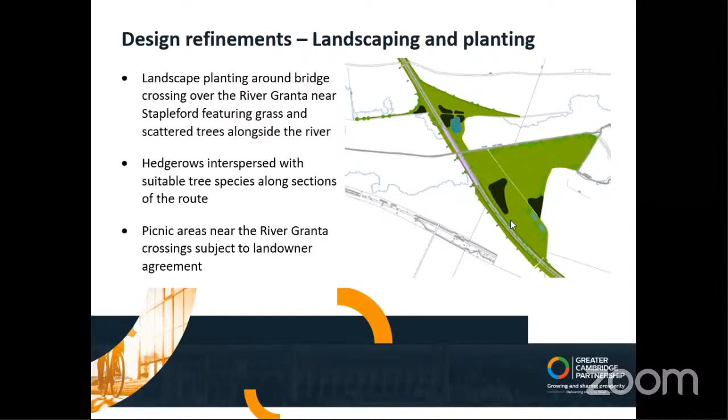So moving on to stops and crossings. The image here shows the latest landscape design for the Stapleford stop at Haverhill Road. The stop layouts at all the intermediate stops have been reconfigured to provide greater opportunities for landscaping. The landscape design includes measures to reduce the visual impact of stops and provide noise attenuation where appropriate.

There was feedback from the consultation requesting the provision of additional cycle parking and storage, so that has now been incorporated into the design of stops. Also a new feature in the design, in response to consultation feedback, is to provide Pegasus crossings, which are signalised crossings designed for use by horse riders, where the public transport route and the adjacent active travel route cross the roads close to the stop. This is at Sawston Road, at Haverhill Road, at Hinton Way, and also at Granham's Road, where there's just a crossing but not a stop.

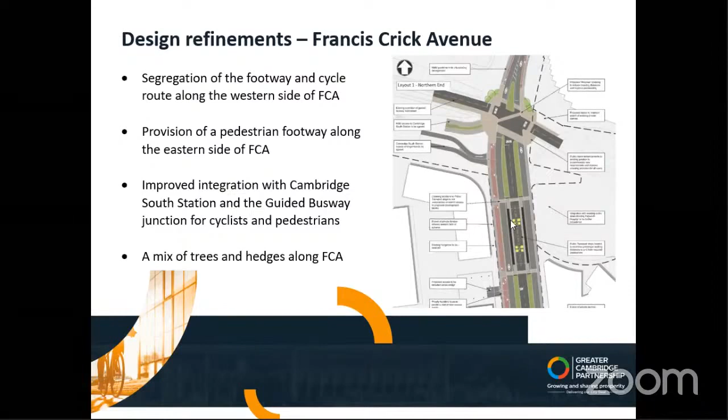Okay, thank you for that explanation. Can you go on to the next slide then, please? Yeah.

So I was a bit confused about the widths of the remaining carriageways here, because presumably those will be the spaces where non-CSET buses will move around the area. Is there room at 3.75 to 3.7 to have both bus and bus stop? Where are the bus stops for the non-CSET buses going to go? I'm confused.

I think at the moment there is only a bus stop on the southbound carriageway of Francis Crick Avenue. The 3.7 metre carriageway width is based on that being the minimum standard for a carriageway suitable for use by large emergency vehicles, so fire engines etc. It would be possible to have a bus stop on a 3.7 metre carriageway. It would just mean that traffic would have to wait behind the bus while it was stopped.

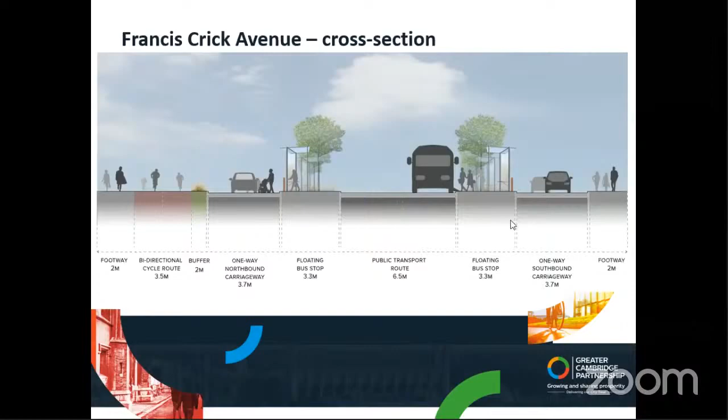Yes, it's more related to the new development that's been built in Sawston / Babraham. The bus route seems to be very close to the new development, with the majority of it not being populated or sold yet, so there's probably been little feedback from this particular area. I just wondered what sort of landscaping and planting for noise and pollution reduction will be taking place - I didn't see that in the previous slides.

Yes, please, James. So there is a small area of land between the route and the boundary of the new housing development. Within that area, there would be an acoustic barrier put up that meets standards required for noise attenuation. Between the acoustic barrier and the route, there would be planting and possibly a bund. The bund would provide further noise attenuation, but it does create problems of landscape maintenance if we put planting in between the bund and the acoustic fence.

The intention is to put planting in there as a bit of screening of the acoustic barrier, because the acoustic barrier will also provide a little bit of visual screening to residents in the housing development. We have had one individual who has purchased a property in the housing development and has approached the project through the EIA consultation, which we've taken on board.

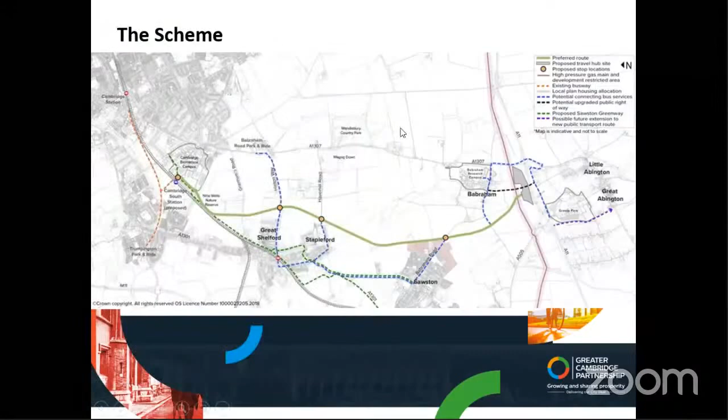I just really, and also our own numbers we're crunching in terms of passenger demand and passenger journey times seem to be overstated on the route. We'll come on to that later when we talk about the Shelford railway alignment, where the numbers look a lot healthier. I'm just really intrigued what's caused the reduction.

Michael? Yes Howard, the 1,250 spaces is based on some further modelling work that has been completed since the outline business case was published, and we've also taken a more conservative view on how many spaces that we can justify.

Over and above the numbers forecast in the modelling, which are only up to the year 2036, and reflect the growth. The growth in the model is based on growth in the existing local plan with some additional allowance on top of that. But because the local plan currently only runs to 2031, there is very little growth in the modelling between 2031 and 2036.

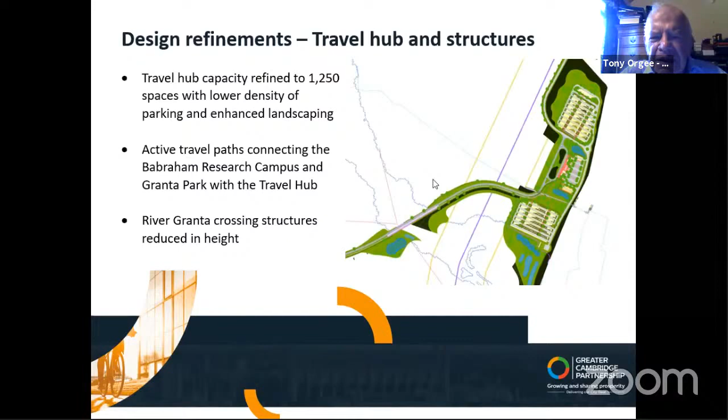Thank you. Okay, I'm just going to go back to Sam Davis, and then I've got no more people who wish to speak, so we'll move on to the environmental impact assessment after Sam. That's very kind of you, Tony.

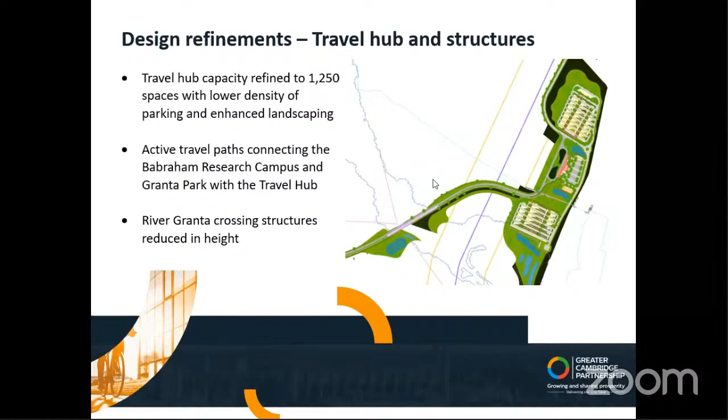Thank you very much. So the one remaining question I have takes us back to the Nine Wells Nature Reserve. You talked about cycle and pedestrian access to it - I can understand that people would like to be able to access that area. Has there been any environmental impact study looking specifically at the likely effects on that very small and fragile space of making it easier for more people to access it?

I don't believe we're making it easier to access it. We are retaining the level of access that's currently available. So on the figure you can see at the moment, people generally walk...

Either up the Genome Path and then walk alongside Hobson's Brook towards the reserve, or they come from Cambridge and walk along the Genome Path down to Hobson's Brook and up to the reserve, or there's a permissive path on the northeast boundary hedge line, which runs up to Addenbrooke's Road embankment there on the top of the figure. We are essentially retaining that level of access.

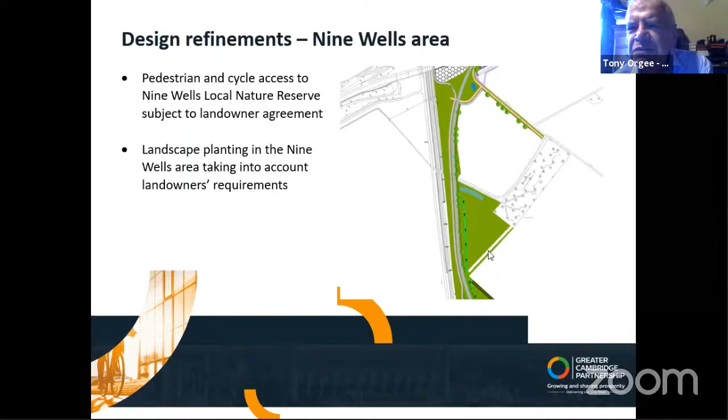So I'm now going to move on to James Montgomery, who's going to talk about the environmental impact assessment. It'll only be a small number of slides, and then we'll break for another discussion and questions, comments, criticisms, and so on. All right, thank you very much, everyone.

Although there may be a few slides, there's quite a lot of text on these, so I'll run through them reasonably quickly and can take questions and discussion afterwards. If you want to go to the next slide, Mike.

So as you would imagine, there are going to be a number of temporary effects during construction. Now, when we use the term significant in an EIA context, it needs to be understood what we mean by significant.

There are standard methods for assessing significance - they are a matrix assessment, if you like. We have to understand what the nature of an impact might be, so we assess the scale of that impact. It is assessed against, for various different topics, different criteria to define the magnitude of that impact. We also consider the sensitivity or value of the receptor who may be impacted by a particular activity.

Those values of those receptors are defined again for the various different topics against standard criteria. As one might expect, the highest value is generally accorded to receptors that have some level of international importance, rolling down to local importance having a lower value. So when we then assess a combination of the magnitude of impact against the value of the receptor, we then determine, again using established criteria, the scale of the effect being the consequence of the impact.

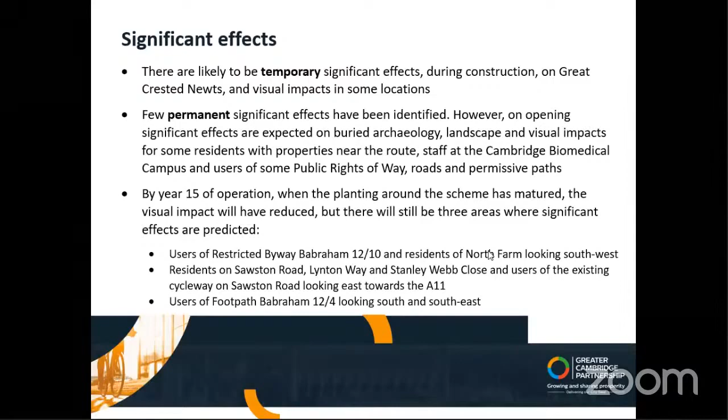Residents on Sawston Road, Lynton Way, Stanley Webb Close, and users of the existing cycleway on Sawston Road, if they're looking east towards the A11, would see some impact. Users of the footpath from Babraham Village to the A11, looking south and southeast, would have some visual impact of the travel hub and the bridge over the Granta there.

These tables, I'm not going to go through in detail. They set out the main mitigation measures. We're not quite finished with the environmental statement, it's still going through final compilation and review. So some of these may change, and we'll need to make that point on the slides released to the LLF members tomorrow.

On air quality, during construction the principal air quality risks are identified as dust. There are standard protection measures for construction dust control, so construction good practice would mitigate most of those potential issues. During operation, as the buses will be relatively infrequent in open countryside, and in due course would be electric, there would be minimal to no air quality impacts from the scheme itself.

In fact, it would lead to some marginal benefits to the air quality management area in Cambridge City itself, because the buses that use the scheme from day one will have to be electric powered to operate in the city. That's a condition we've agreed with the Environmental Health Officer for the city.

There's a whole range of biodiversity mitigation measures. There's a construction and environmental management plan produced in draft, and a landscape and ecological management plan also in draft. These will be submitted as part of the TWAO application to demonstrate commitment to management measures both during construction and operation, and will be finalized if the scheme is given approval by the Secretary of State, taking into account any other conditions from the planning process.

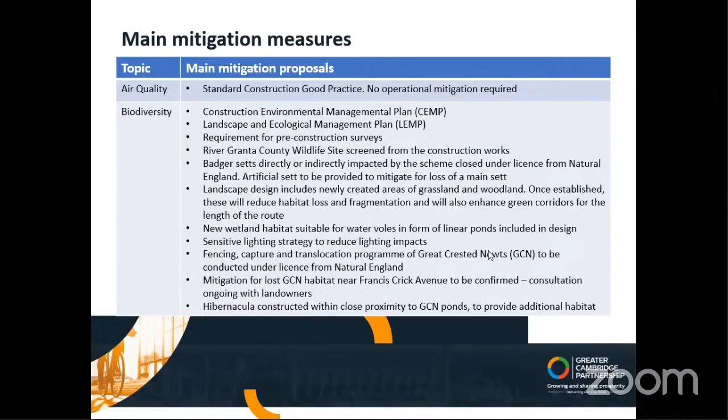We've talked about watervole habitat creation already. The landscaping would improve connectivity along patches of woodland and grassland along the scheme. There are a couple of badger setts that are impacted, which we would have to close and create new ones.

For climate and carbon, I've already mentioned the electric powered buses during operation. There is a standard for assessing carbon PAS 2080, which looks at both embedded and operational carbon, and that will be followed. It's already been used to try and improve carbon from the scheme in terms of carbon embedded in the design, and we expect that to continue through into detailed design. It's a standard used by many public bodies these days.

And there are solar panels proposed for the travel hub to provide power for the operational requirements of the hub itself.

For the historic environment, we've already done archaeological investigation. There will be further archaeological investigation with recording of assets that are uncovered.

We've reduced the Granta crossing at Stapleford to minimize its impact on the landscape and setting there. There's a listed building with a long view of the Granta Valley, up towards Magog Down, and one of the reasons for trying to minimize the height of the bridge was to reduce the impact on that long distance view from up there.

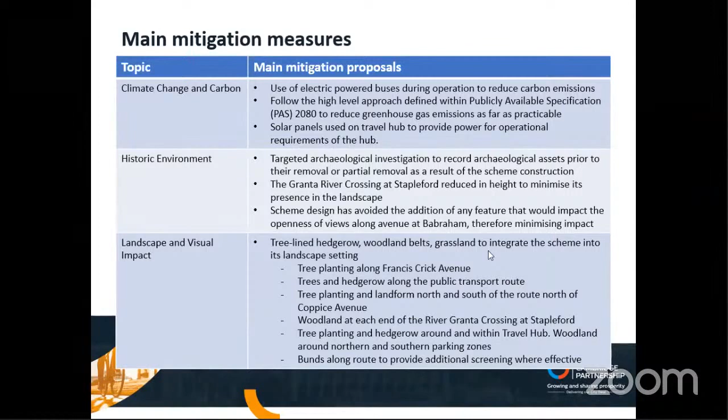Noise and vibration: generally the scheme delivers no significant effects along the route itself. This is largely due to the relatively low numbers of vehicles compared to a normal highway.

The scheme will also have a low noise surface along the dedicated route. In a few places where there is development close to adjacent housing, acoustic barriers and bunds would be put in. These are not very high bunds, aimed to be around a metre in height, relatively close to the actual carriageway. The closer you can get the noise attenuation measure to the source of noise, the more effective it is. In places where we'd put a bund, the main noise source is likely to be tyre noise on the road, so a low bund near the road has as good, if not better, noise attenuation than a taller screen or fence further away.

There will be construction noise that will be controlled through limiting working hours to standard normal construction hours, and limiting work at weekends or overnight to only that which is essential. There would be temporary acoustic barriers around areas where there might be noise, and any plant would have appropriate noise mitigation on engines and, for example, generators on site.

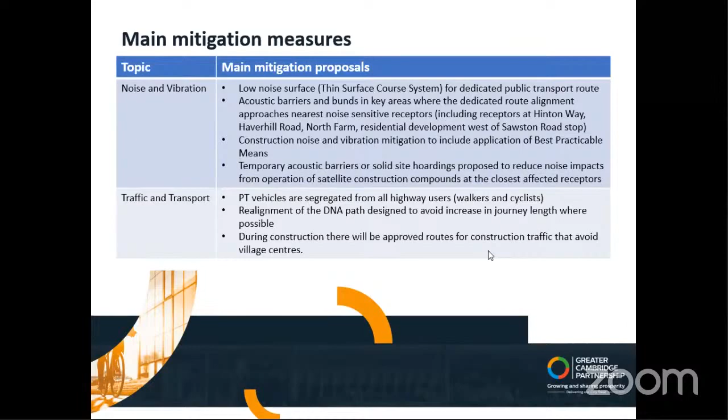Water resource and flood risk: we've taken into account climate change. It's embedded in the design process these days for any drainage design and flood risk assessments.

We're minimizing any vegetation clearance along the river banks of the Granta to minimize any impact on ecology. Temporary bridges would need to be up-and-over bridges, not simply a culvert in the river itself. There would be no storage or stockpiling, and so on.

The entire drainage design is based on a SUDS design, so that's embedded in the design principles anyway. The scheme includes some flood compensation areas where there's a very minor loss of flood storage from the bridge structures crossing the floodplains.

We've provided flood compensation storage as part of the scheme to compensate for that. On resources and waste, there is an outline site waste management plan which would be developed further, and the construction environmental management plan will detail how pollution control, material storage, waste handling, and emergency planning are to be dealt with during construction. There is also a draft spoil management strategy setting out how soils are to be managed during construction and how they might be reused on site.

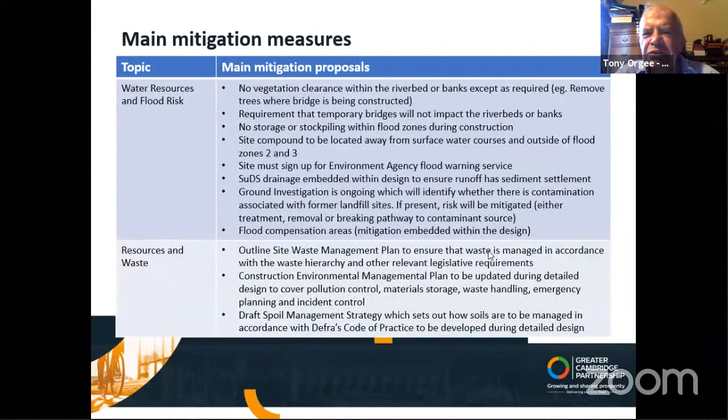So just a small number of slides, and then we'll break for comments again, questions, concerns, etc. Okay, so just to explain to everybody what the pink route variant is, this originated as an alternative alignment that was proposed in responses to the EIA consultation. So the next slide explains this.

So you can see on this plan there are 3 routes taking different alignments from the travel hub, which is the shaded outline, and all joining up at the same point after they have crossed High Street. The most direct route is the current preferred route, the brown route from the 2019 consultation on route options. The plan also shows one of the other shortlisted routes from the 2019 consultation, which is the pink route. The pink route runs closest to the A505 Granta Park interchange and to the north of the old railway alignment at that point.

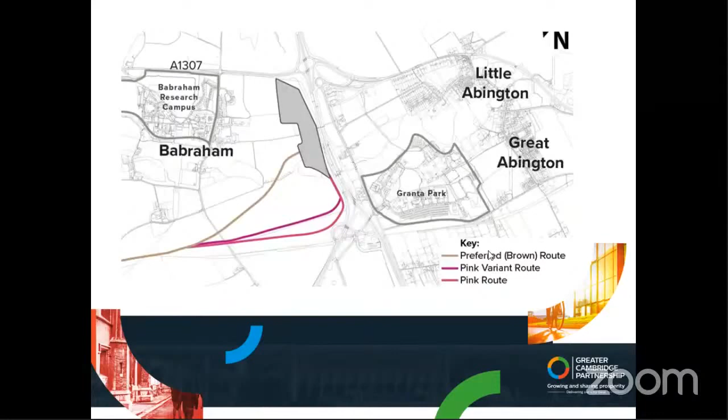Okay, I'm grateful to the chairman for letting me have the time. I've had my time. I'd just comment that looking at the comments on the chat, I'm not alone. Yep, okay, thanks for that, Jim. I think your comments about Howard lead naturally onto the Shelford, the Stapleford Railway realignment.

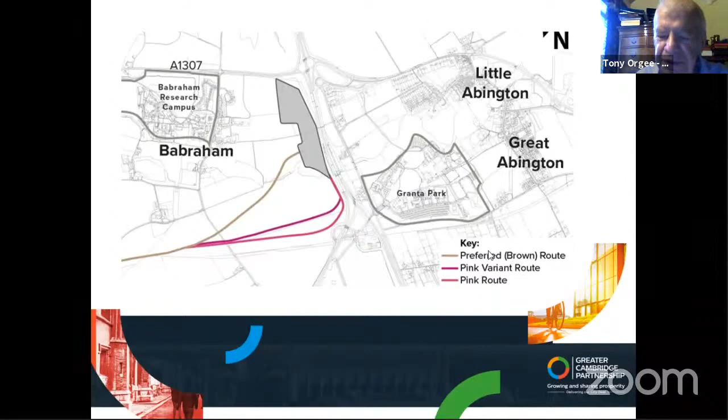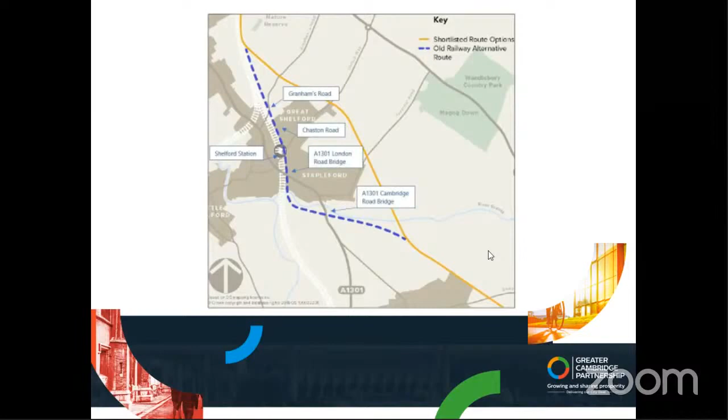So the history of this, very briefly, is that this alignment was considered at the strategic outline business case stage of the project and was rejected at that stage. The basis for the justification for rejecting this alternative has been subsequently questioned by stakeholders, and that resulted in GCP commissioning Mott MacDonald to undertake a further study of the Shelford Railway alignment, which was published in May 2020, prior to the board decision to adopt the preferred route.

Subsequently, Great Shelford and Stapleford parish councils commissioned a report from iTransport consultants to independently review the Mott MacDonald work on the Shelford Railway alignment. In response to that, GCP commissioned a report from Atkins, and the brief for Atkins was to conduct an independent review of all the previous work on the Shelford railway alignment - the work done by WSP at strategic outline business case stage, the work done by Mott MacDonald published in May 2020, and the work done by iTransport, published in March 2021.